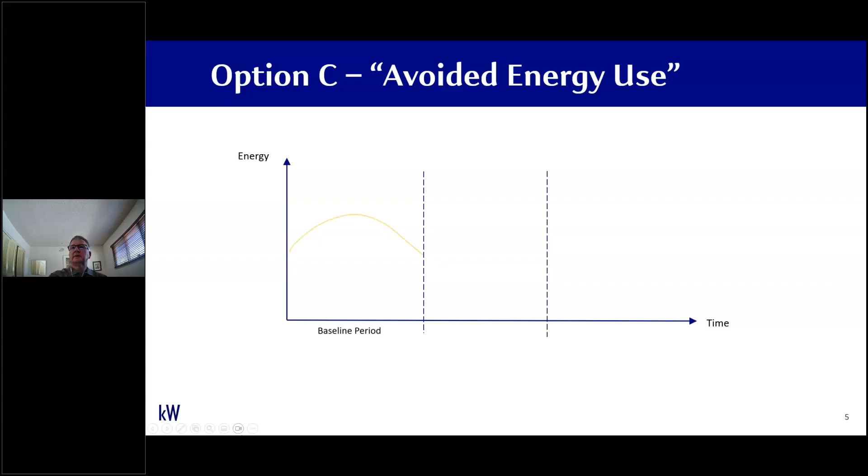Moving on from there, let's just level set where we are when we're talking about Option C—real quick, what Option C is. There's an avoided energy use scenario where you might have energy use over time, with three distinct periods: a baseline period, an installation period, and a post-installation period, also known as a reporting period or performance period, where hopefully the energy use has gone down.

So the first step is to build a model and then make predictions in the post-installation period of that model, so you can compare your energy use—what your baseline would have been—with your actual use, because you want to determine your savings on an apples-to-apples basis. And I put an asterisk there because that's really what we're going to talk about.

That's valid if the conditions of the building don't change. John hinted at that in the blurb for this webinar, that often conditions change, and so then what do you do? We've learned a few things we could provide back as feedback to the industry. Hopefully that's helpful to you.

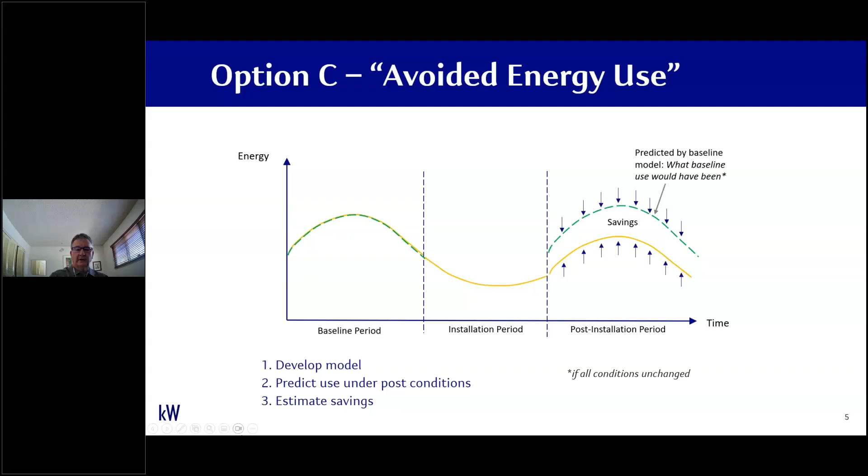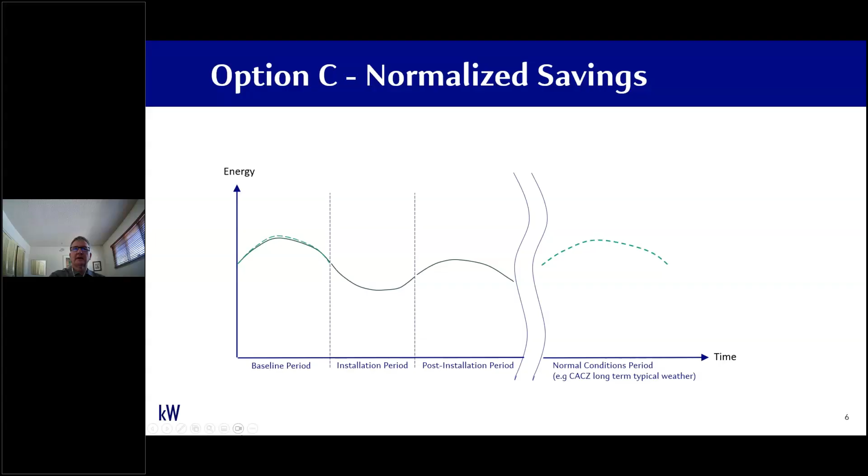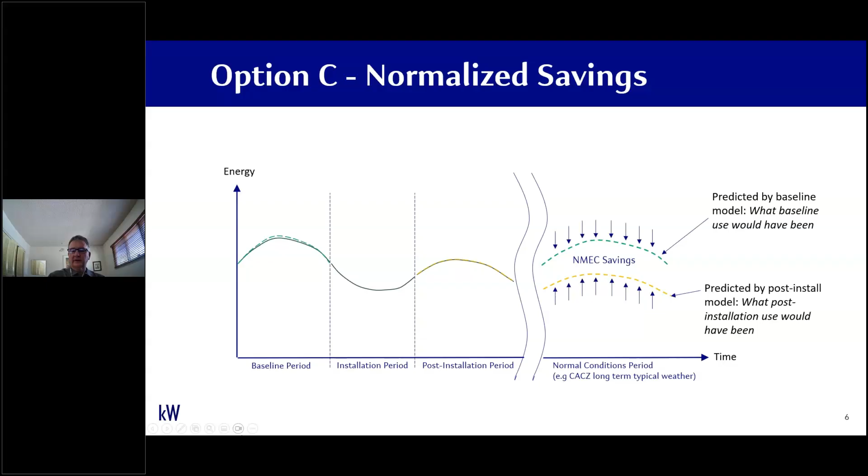So anyway, the savings are the difference between those two. Normalized savings are very similar. The only difference is you've defined a normalized conditions period and you're making a baseline model and a post-installation period model, predicting under normal conditions. The savings between that are the normalized savings that we report in these utility programs, or the NMEC savings.

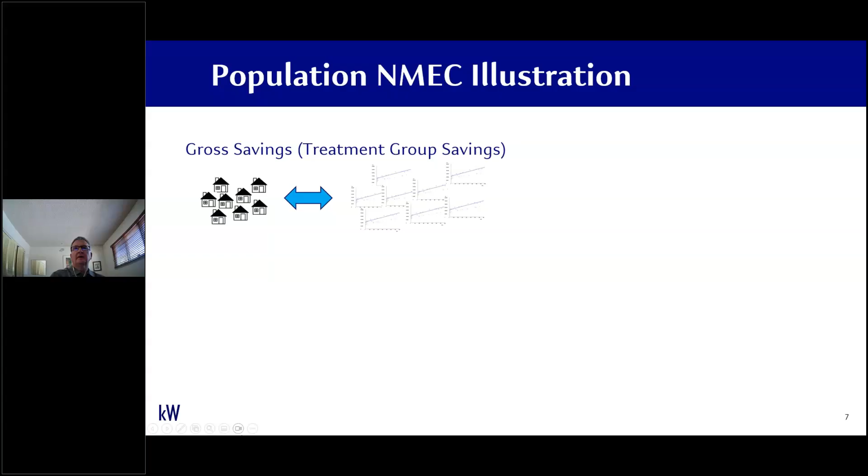Just a quick illustration of population NMEC. You determine the gross savings from a treatment group. For every individual in that treatment group, you determine the savings using the standard static M&V methodology and sum it all up, and you get the total gross savings, or the average gross savings of the two.

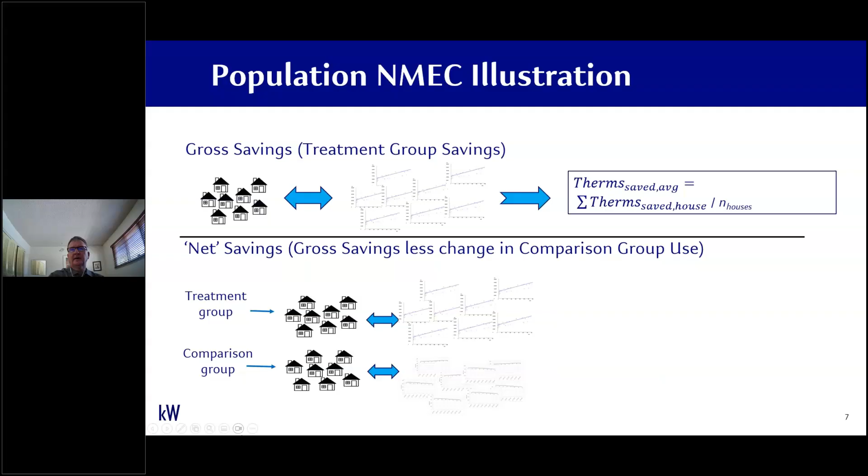But then you have to develop a comparison group to figure out what the exogenous effects are. So you still have your treatment group, but you also have a comparison group of buildings similar to that, which represent how the impacts of whatever exogenous effects going on those buildings that haven't been treated. And so the savings you actually report under a population approach is the net savings, net of exogenous effects. David, do you do this exogenous comparison group in that treatment even if there is nothing going on, like COVID, or do you just do that anyway?

Often, that can happen, that the exogenous effect can be very minimal, and so it's negligible. But generally, to do a true population NMEC, you do have a comparison group, and you go through this activity. That's pretty neat.

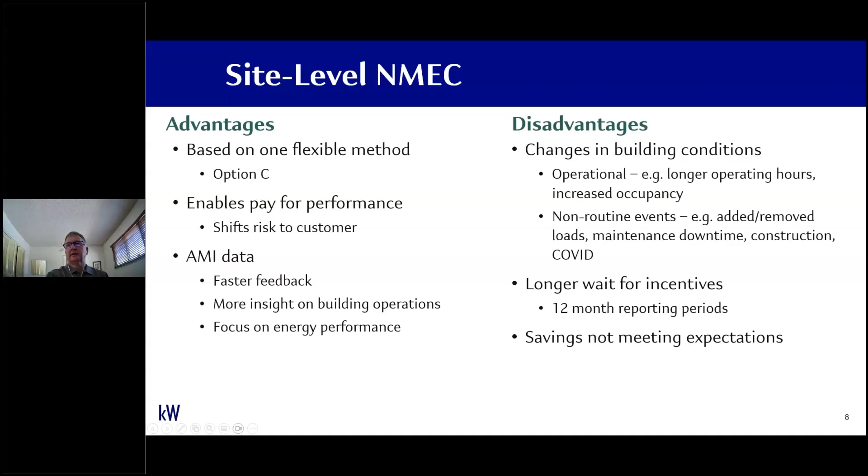So just contrasting a little bit, the advantages of AMI data. In the past, we had monthly billing analysis. You only get 12 points a year, in general, to make a baseline model. Generally, the models are linear regressions, something very simple. The less data you have, the less accuracy your model has. And also, if you have any non-routine events in your building, it's hard to detect in monthly billing analysis. And if you do detect them and you need to address them, it's usually a separate engineering type calculation to estimate them and remove their impacts from your M&V analysis.

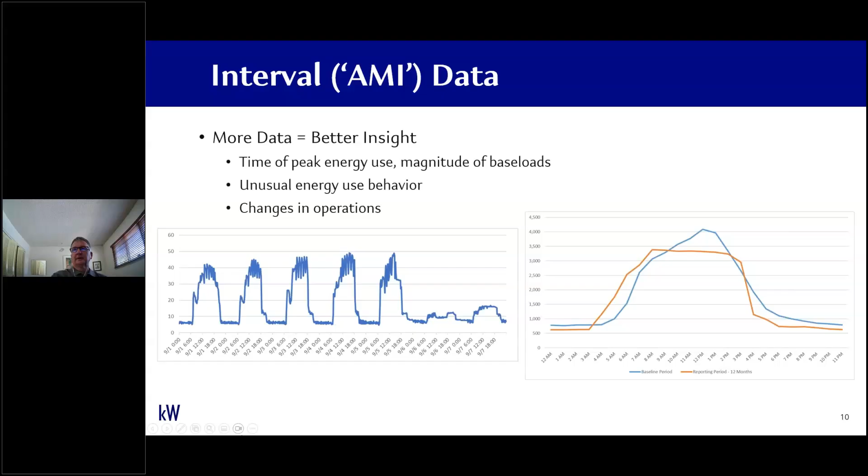So M&V with AMI data is going to be more accurate. You have a lot more data points. More data generally means more accuracy in your models. The modeling algorithms tend to be more advanced, not a whole lot more advanced unless you really want to, but a little bit more advanced. You're going to get better accuracy, but also the possibility of using shorter monitoring durations. Maybe you can make good energy models for your baseline or reporting period with a shorter duration of time.

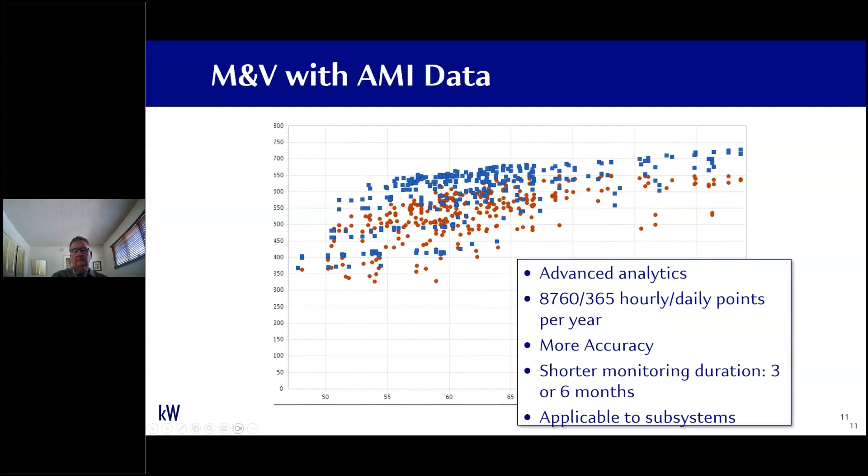All you really need to do is have a whole cycle of operation, your highs and lows of energy use in a year. And maybe you can achieve that in 3 or 6 months and not have to wait 12 months to pay off your incentives at the end of the day. So it's a possibility. If you have sub-meter systems in your building, you can apply this methodology also to that sub-meter data.

The advanced analytics I'm talking about: there's the familiar, which we know and use in monthly analysis, which are basically linear ordinary least squares regressions. But there's some more advanced ones. There's still regressions. There's ASHRAE's family of change point models developed by folks at Texas A&M. There's an example of one out at the right there, a 3-parameter cooling model.

But there's also one from LBNL that incorporates the time of week into its model. So it's a model that is very appropriate for regularly scheduled and temperature sensitive buildings. Regularly scheduled means it's generally occupied Monday through Friday during the week and not on weekends. That model is very good at recreating those patterns and predicting those patterns.

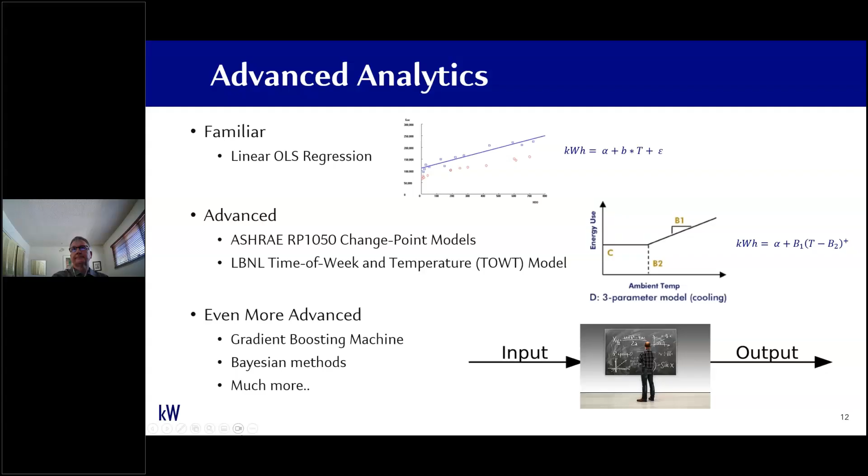But there's no reason you can't use even more advanced type models, machine learning type models, gradient boosting machines, Bayesian methods, and so on. As long as you can test for model validity, there's no reason why you can't use any modeling method. So how do we judge models?

In the NMEC rulebook in California, we have to make sure that the bias error and the random error are minimized. They're measured by these metrics, the normalized mean bias error and the coefficient of variation of the root mean square error. Really, the CVRMSE is kind of the metric that we focus on because it tells you how much random error, how well your model actually predicts your data. There's a third one, the R squared. That really just tells you how much explanatory power your independent variables have on your dependent variable.

But it can be very low for buildings that don't have a lot of variation in energy use, like maybe a data center or something like that. You can make a perfectly fine and accurate model for those, but your R squared is going to be low. So R squared should not be a disqualifying factor. So we use it as guidance more than a requirement.

But probably the best thing to look at is the uncertainty. So if you have a baseline model and forecasting a certain amount of savings, then you can look at the uncertainty. ASHRAE Guideline 14 has formulations for looking at the fractional savings uncertainty that's really popular for use. There are other methods as well. ASHRAE's criteria is that uncertainty has to be less than 50% at a 68% confidence interval. In California, we bumped that up to a stiffer requirement, the 90% confidence level.

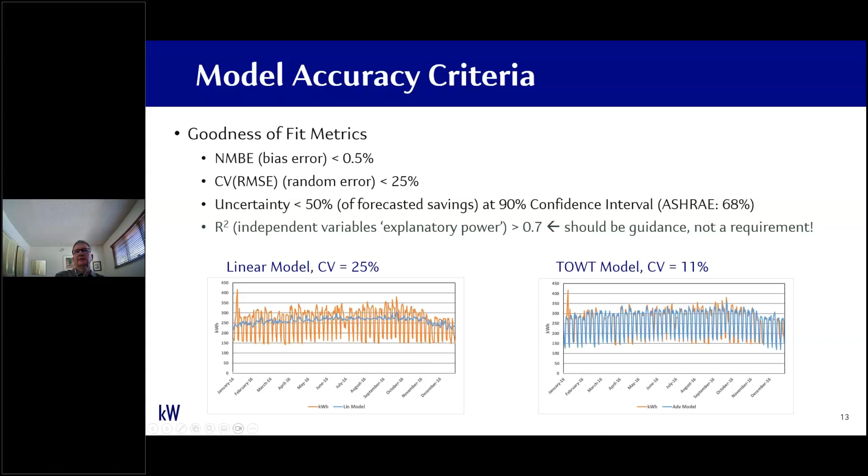So you can, when you pre-screen a building, look at the uncertainty of your forecasted savings to decide if your model is accurate, if you're going to have a robust estimate of savings at the end of the day. It'll also tell you how low you can go really in savings before your uncertainty is too high.

There are risks with option C. One is the building's not predictable, so the energy use is not explained by weather, schedule, or any other independent variable. Your modeling algorithm might be insufficient. There might be too many NREs going on. So it's really important to pre-screen your building before deciding it's a good candidate. Because when you get into an NMEC project in California, you're really engaging the customer for a long time, up to 2 years.

There's a 12-month reporting period after all the measures are installed, and often the time between when the project application is signed and the measures are installed can be up to a year or longer. The rule book allows 18 months. So it's really a commitment you're making to every individual project to engage with them over a longer time. So you want to make sure it's a good candidate up front. And doing them a few times gives you the experience to make assessments on what makes a good candidate building.

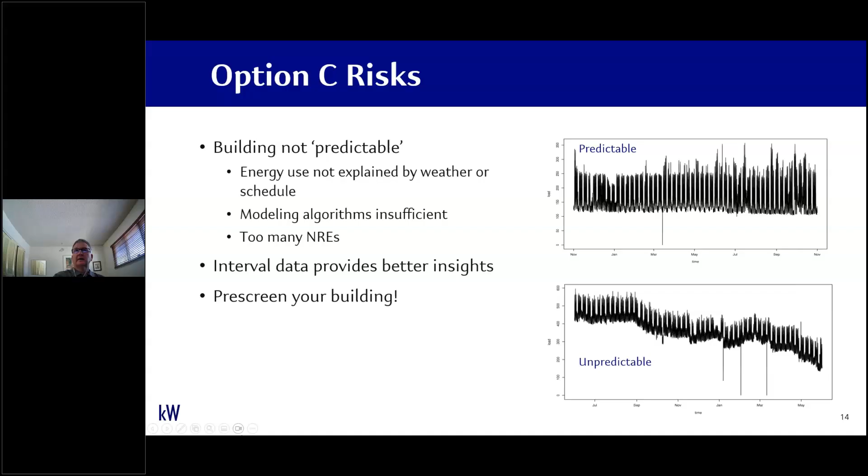There are tools out there that you can use. KW Engineering puts out NMECR. It's in the public domain. It uses the R package, which is also public domain software. It uses a number of modeling algorithms, including LBNL's modeling algorithm. We put it out there so people can use it and give us feedback on it and improve it over time. And it's open source. And it's really out there just to promote the whole concept of NMEC, using NMEC for efficiency programs.

A really good precursor to that was the energy charting and metrics tools made by Bill Koran. We had a webinar here at one time, I think last year sometime. It's still available on SBW Consulting's website here. It's an implementation of change point models. It's an Excel add-in.

And then there's a lot of fee-for-software type tools available out there. There's OpenEEmeter from Recurve. It's an implementation of the CalTRACK methods. I really don't know the costs or anything about it, haven't used it. I have used Energy Explorer way, 10 years ago. It was really great. It did the change point models. It's made by Professor Kissock, who was originally part of the ASHRAE Research Project 1050. That really kind of boosted this whole activity for whole building M&V.

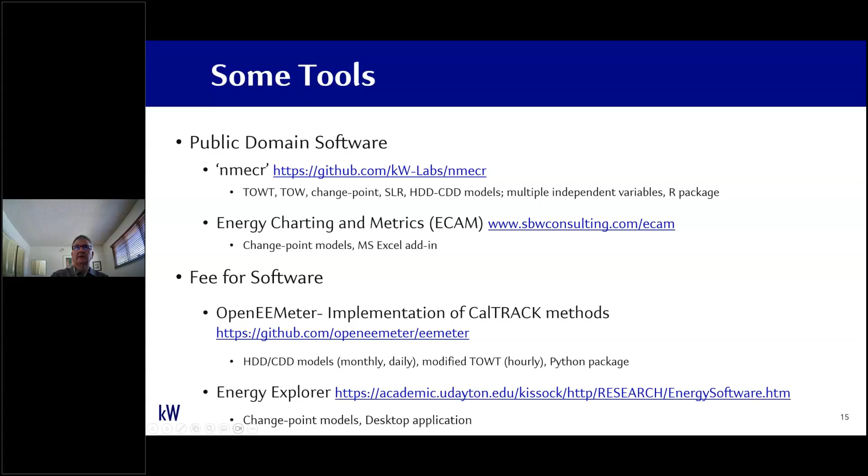All right, so that's all background. We're finally going to get to some examples of how we handle when your conditions aren't the same because you've had some sort of non-routine event going on in the building. So non-routine events are changes in the building or its operations, and they're not related to the measures or regular driving factors of your energy use like temperature or regular operating schedule. Some examples are temporary shifts in load due to maintenance, equipment shutdowns, that kind of thing. They could be constant load or variable load shifts.

You really have to visualize it in your data and see what's happening and really get with the building operators and understand what's going on. Because you're really not going to see it in your energy data unless it's really significant. Little minor things generally you can't control for, can't detect. But the big one that we've had to deal with, whether it affected the baseline period in some projects or the reporting period in other projects, is the impacts of COVID. And COVID caused a shutdown, which reduced occupancy and lowered building energy use in those buildings.

Some of them reduced their operation schedules, and places like schools increased the ventilation, like maybe they propped open the economizers to get more fresh air in the building or ramped up their variable speed fans to higher volumes of airflow to increase that ventilation. There are various methods that are out there.

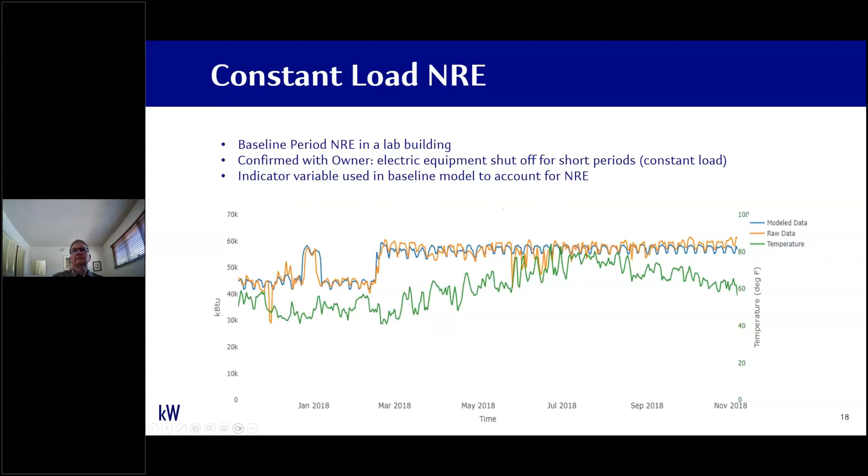The building itself was a large public office building with an attached public theater in it. And as a result of the shutdown order, they closed the theater operation for the next year. So that's the cause of the lower energy use. The public office portion of the building, which is probably 80% of the building, didn't change its operation, just the theater. So when we saw this effect, we started asking questions of the operators and found out that they had variable speed fans in the theater controlled by VFDs, and they trended that data and stored it in a historian. I realize that's not always available in every building, but we were fortunate it was in this building.

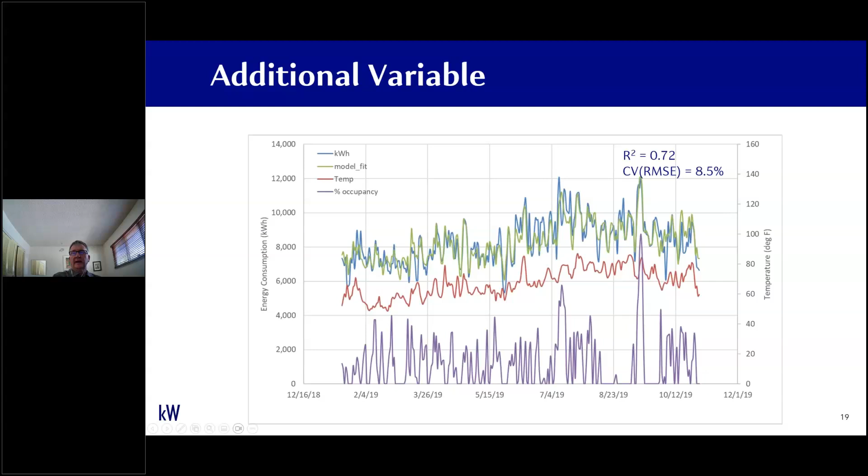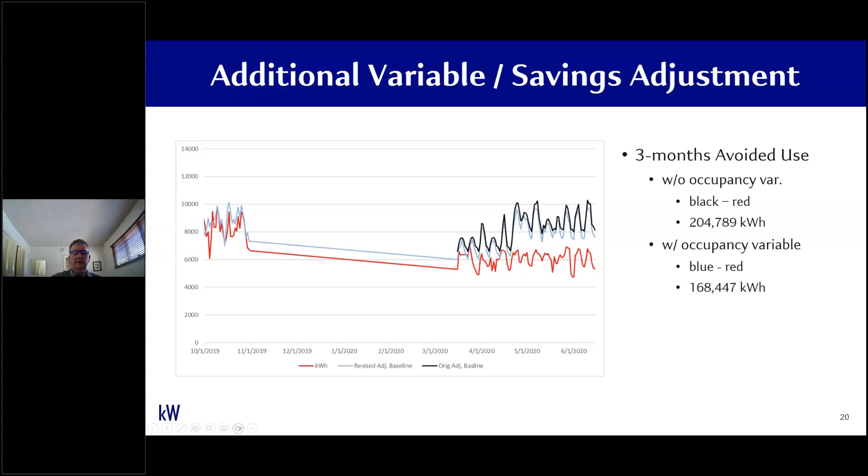Got a better estimation of the actual energy savings. So that's sort of an example of using an additional variable in your model to represent occupancy. We've used other proxies for occupancy in other projects, and some examples of what we've used are key card swipes. So it's amazing that this data is actually available.

Start thinking about it. Maybe you have a secure building. From the building security system, you can get the number of key card swipes per day. That's a good proxy for occupancy per day in your building. So you can actually get granular data on occupancy. Who would have known? Wi-Fi connections per day from the building IT network. That's one we used in a different project, and I just explained the one we used for variable speed fans

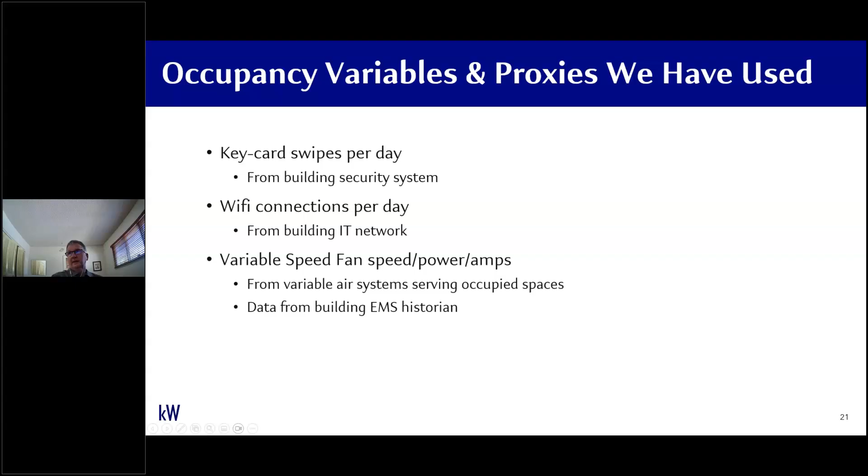in the theater. Yeah, and the other requirement is that you have that data throughout your baseline and reporting period, which is often kind of difficult to get, not very common. But there's other methods that you can use, and one that the guide puts out is this mini model approach. This is a recent project also. It's actually an ESCO project, and they recommended a number of efficiency measures as well as installing a solar PV

system in a building. But that building had a regular utility meter, not a net meter. And when you install a PV system that starts generating, naturally the energy pulled off the meter is going to go down, but that's not actually what the building uses. What the building uses is the energy delivered by the meter plus the solar generation less what's delivered back through the meter. And that energy meter will tell you that delivered and received data, and you also need the solar data. But in this case, we didn't have the received data.

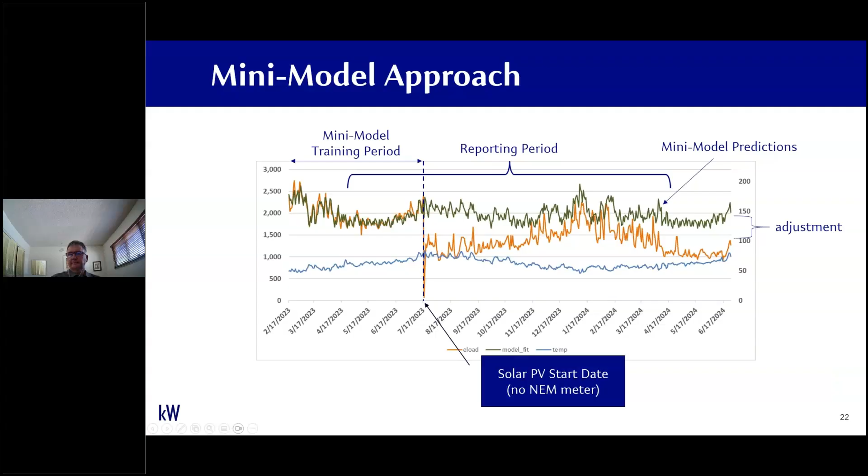And there's one other approach, a CUSUM approach. Here is a building where, again, we made a baseline model. It was pretty good. The customer started installing the measures, and then COVID hit in the middle of it. And so what we did was make predictions over the installation period and the reporting period.

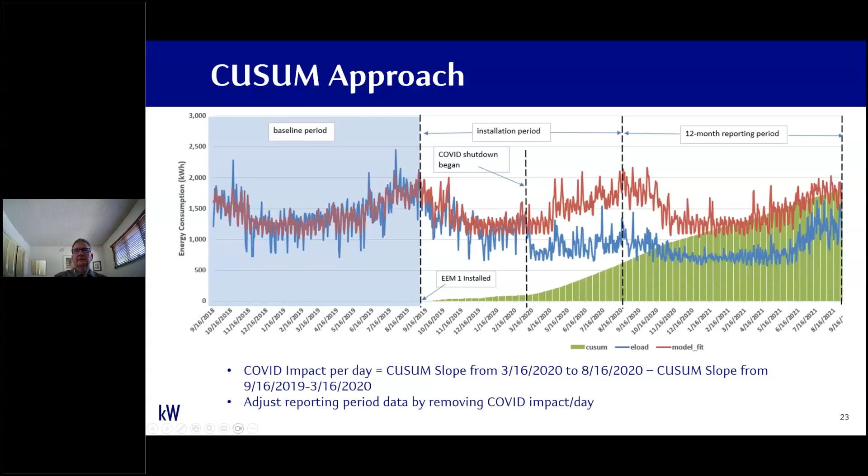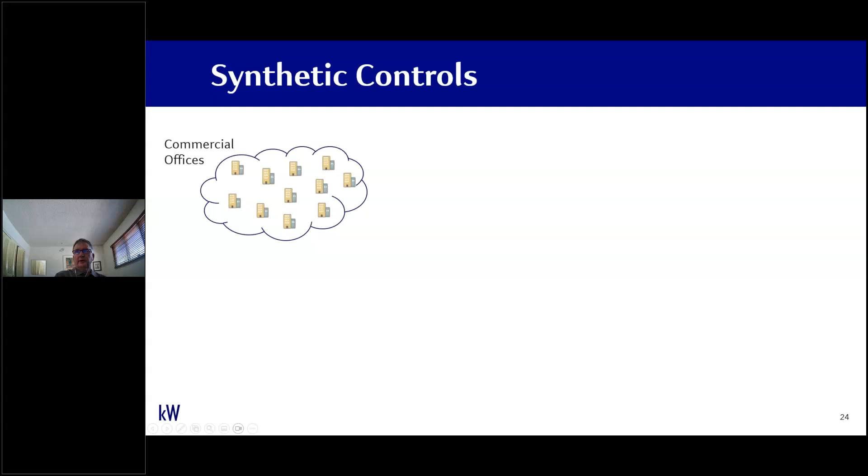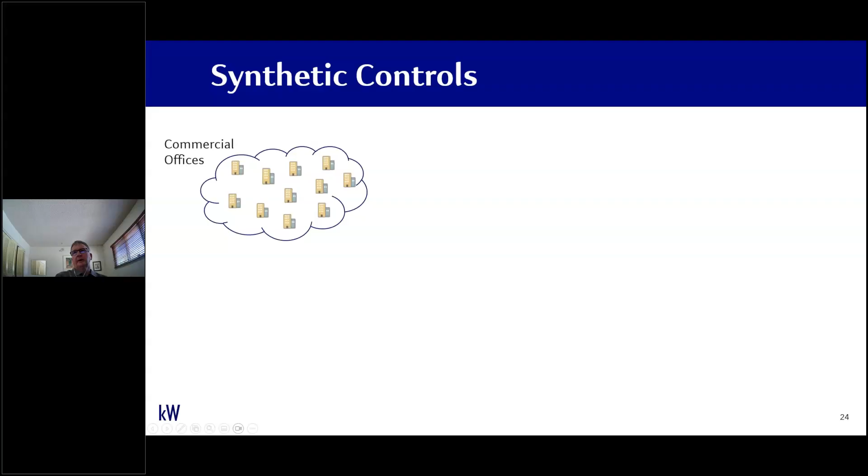The method that I want to talk about from population M&V is called synthetic controls. And so in that approach, I just want to talk about the concept initially, and then show how you could use it to account for an exogenous effect like COVID. Say you're doing a project in a large commercial building, and so your treatment group, if it was a population program, would be another group of commercial buildings that are very similar.

Sorry, got ahead of myself a little bit. So what you do is you take a large group of those similar buildings and get their AMI data and determine their load profiles throughout your baseline and through your reporting periods, and average them together essentially, and that creates a granular profile. So you'll hear this term also, granular profiles.

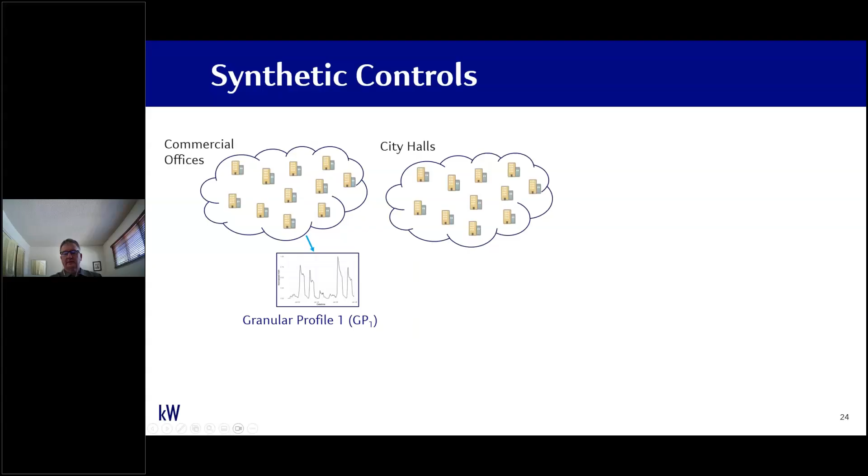But maybe your particular building is also similar to another type of buildings like city halls, and I'm just using office buildings as an example. It could be any type of building. Find similar buildings, like maybe a group of convenience stores might be similar to a gas station or a grocery store or something. You can test this out if you can get the data. Just develop granular profiles from each one of them. So I have commercial office, city hall, corporate headquarters, developing another granular profile.

And then you just put it right in your baseline model, a linear regression, temperature, these granular profiles. And then when you do a regression, you test for the significance of your additional variables and keep the ones that have some influence. Those coefficients might have a t-stat that's higher than 2, for example. It means they do have some explanatory power of your energy use in your particular building. So you do that for both your baseline and your post-installation, and once you have your models specified and set, you use that for your savings analysis.

So it's synthetic because you're talking about a particular building that's maybe similar but not quite like the other buildings in your set of granular profiles. Those granular profiles also capture what's going on in that group of buildings, and so you're kind of capturing that exogenous effect right in those granular profiles that you're using in your target building. So this is kind of where site level and population M&V meet, kind of in the middle.

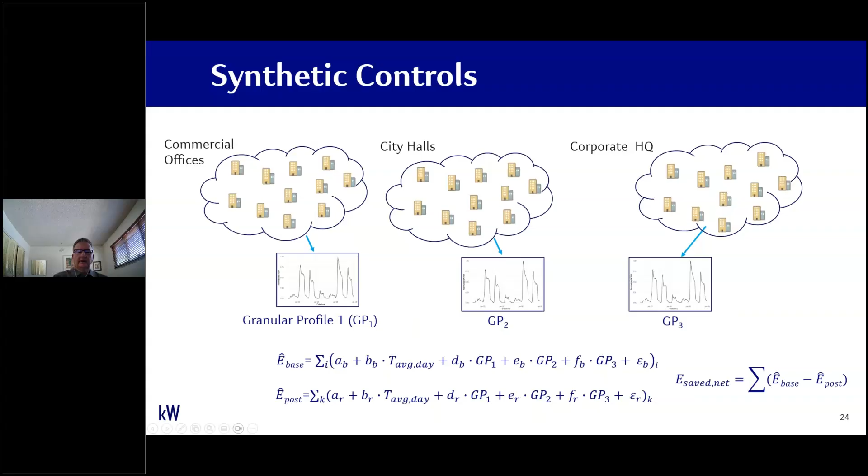But it's hard to get those granular profiles together. You need all building data, and that's a lot of extra work, as I was saying up top. But it is a way utilities can actually help the industry. And for example, PG&E has done this.

They've taken their utility data for their customer base and developed residential and commercial building granular profiles. They've published this on the CalMac website under customer load shapes, right here, and you can actually pull them off.

It's a nice way for utilities to help the industry. They can publish these granular profiles, which means they don't have to share identifying information about individual buildings to outside parties. They can just do this analysis internally and publish these granular profiles. So I encourage you to review this website and check it out and see if it's helpful for you.

So just to wrap up here, just to restate some best applications. We want predictable buildings to do a good NMEC project. Typically they're weather sensitive and regularly scheduled, as they are in the commercial and residential sectors. You want deep savings, and often that means multiple and interactive ECMs that affect many systems, so both lighting and HVAC type projects and controls are very good.

You want your savings above the noise, so definitely get multiple projects in there that are going to show above the noise. How much above the noise is really what you're going to determine when you pre-screen the building up front. Look at that uncertainty criteria.

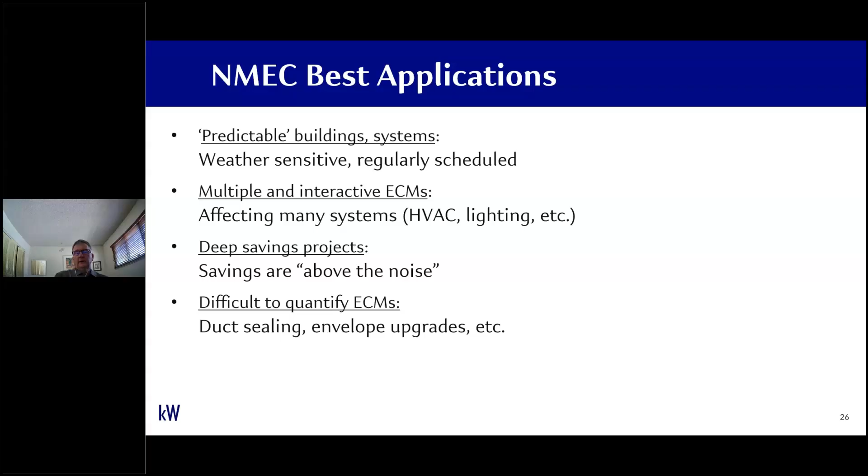It's also good for projects that are difficult to quantify, like retrocommissioning buildings, duct sealing, or envelope upgrades and things like that. It really reduces the overhead cost of estimating some of those more difficult to quantify measures. So anyway, that's it for me.

So the first one I have, which I think I hinted at on LinkedIn but I don't think we've addressed, is when this NMEC thing first came out, the legislature in California required this, and I think it was a shock to a lot of us in the industry. Is that right? I think it was a shock. I don't know, maybe I'm wrong.

What I heard from some people is that they didn't really know what they were asking, and that the CEC, the California Energy Commission, and all these consultants were going to have to figure out how to make this work. I thought there was a bit of pessimism. I know I had a lot, saying this is impossible, it's not going to work.

How has this gone? I think it's a learning curve. There's some initial sorting out between what's really population-level and what's really site-level NMEC, and what goes into it. The idea going into it was, well, this is great, we can measure the effects of these efficiency programs in a way that customers perceive them, which is based on your meter data, not individual savings calculations.

The thought, maybe somewhat naive at the beginning, was that if you put in these measures, you should see it in the whole building data, if you can account for all those other factors. So I think we went in as an industry and said we can handle these issues and quantify them, but some have been intractable and haven't matched up, and some program timelines are so long that buildings do change operations over time. So we probably have some catching up to do on how we adjust for all that.